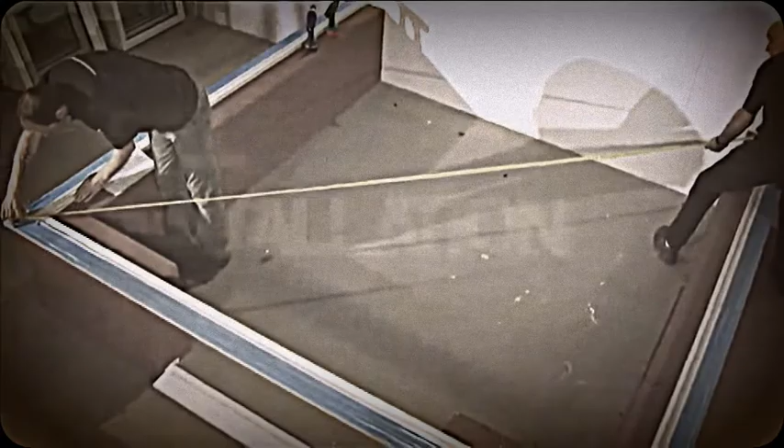Sill connectors. Join the sill sections with the appropriate sill connectors and assure that these are silicone sealed on all contact areas. Fit the sill's connectors to the sill using the screws provided. Measure the gap left for the doors and cut the sill to size with a saw so that it overhangs the brickwork for the door by 2 mm on each side. A separate length of 150 mm sill is supplied to fit between the dwarf walls.

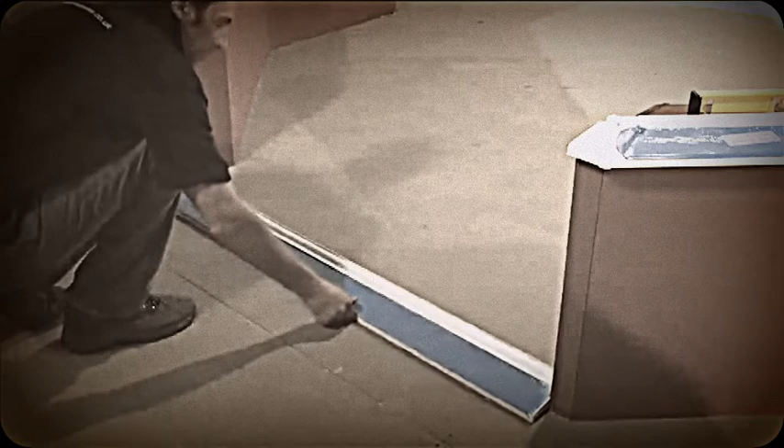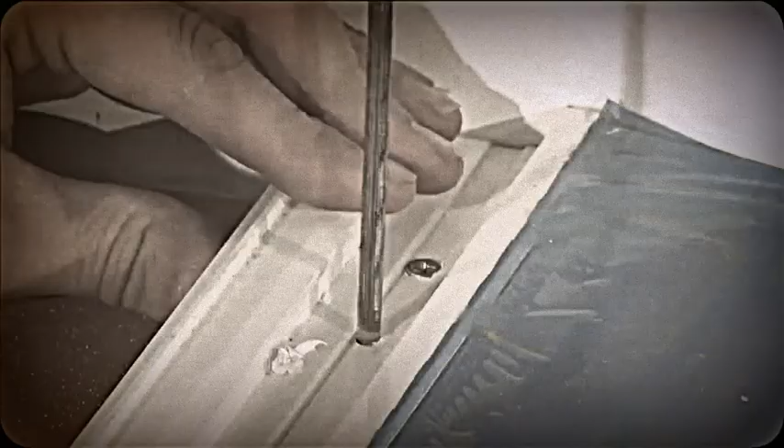Fixing sill. See your installation guide to view the key measurement checks. Once you're happy that this is accurate, drill through the sill and into the base to a depth of at least 100 mm. Permanently fix through the sill using the fixing bolts. These should be positioned 100 mm from each end of the sill and equally spaced.

Fitting first windows. Note, the wall connector supplied might be different to the one showing. Please refer to your installation guide.

Fitting panels. Locate the wall plate and connectors and mark out the position of the relevant fixing bolts. The first and last 60 mm fixing bolt should be positioned 50 mm from the top and bottom faces of the wall connector, with the rest being spaced equally between. A total of 3 fixing bolts are used per wall connector on a dwarf wall model and 5 per connector on a full height model.

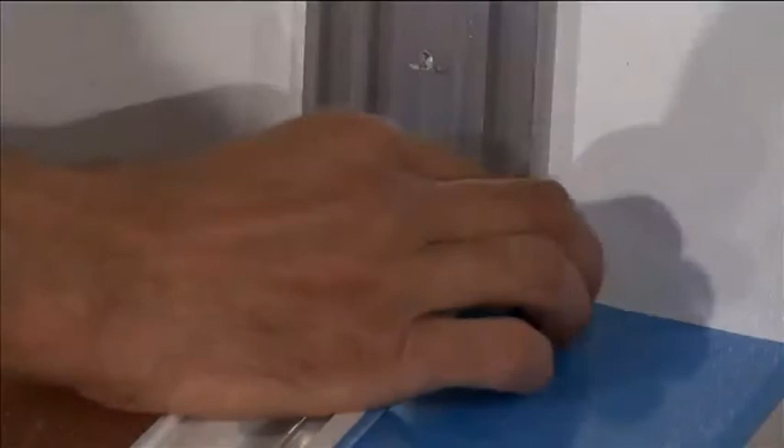If any of the positions marked for the 60 mm fixing bolts land on mortar joints, adjust the position accordingly so that they locate over solid brick. Position the wall connector so that the internal edge is in line with the margin on the wall drawn earlier. It is important to ensure that the connector is at an angle of 90 degrees to the base. Use timber packing if required.

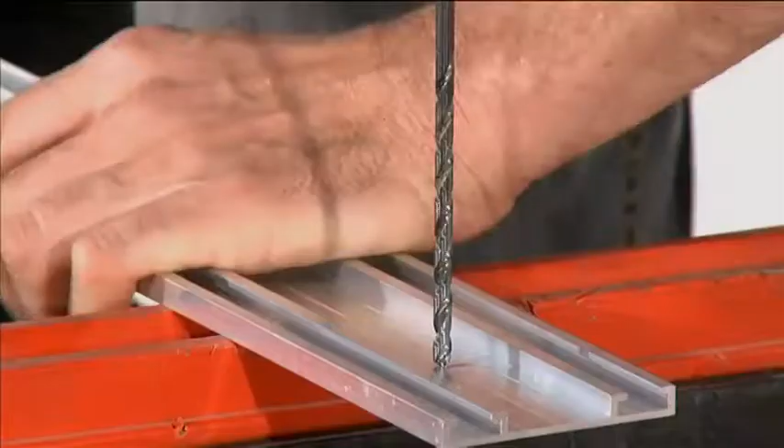Pre-drill the holes with an 8 mm drill. While holding the connector in position and ensuring that it rests onto the sill, pre-drill through the connector and into the brick using an 8 mm masonry drill. You're now ready to fix the connector with fixing bolts. Repeat this on the opposite side of the conservatory.

Some fixings shown in this DVD are for studio build only. Please refer to your installation guide for the correct fixings required.

Fitting first panels. Select the panel to fit against the property wall. Ensure that the drainage slots in every panel are located at the bottom of the panel and facing the outside of the conservatory. You'll notice that each panel corner has the inner legs on the panel detail notched away.

It's essential that this detail is present to ensure that all 18 mm inline couplings can slide into position. 2 sill support blocks should also be attached to each panel. If they're not, please refer to your instruction manual.

Position the window close to the wall connector. The legs of the sill support blocks should line up with the channel of the sill. Push or tap the window firmly downwards to clip into place. The base of the window should sit firmly down onto the sill. Check your installation guide for an alternative method.

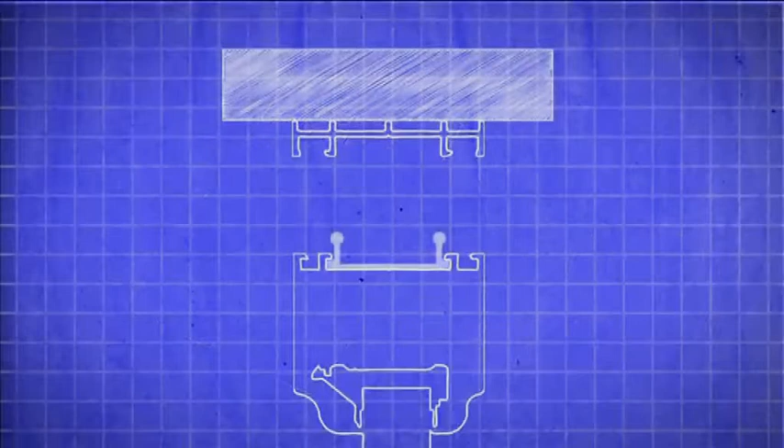Select the A129 wall plate adapter and 2 A128 wall plate connectors. Slide the adapter and connector downwards so it's held by the window's inner legs until it rests onto the sill. Slide the window and connectors along the sill to engage the legs of the connectors with the legs of the wall plate.

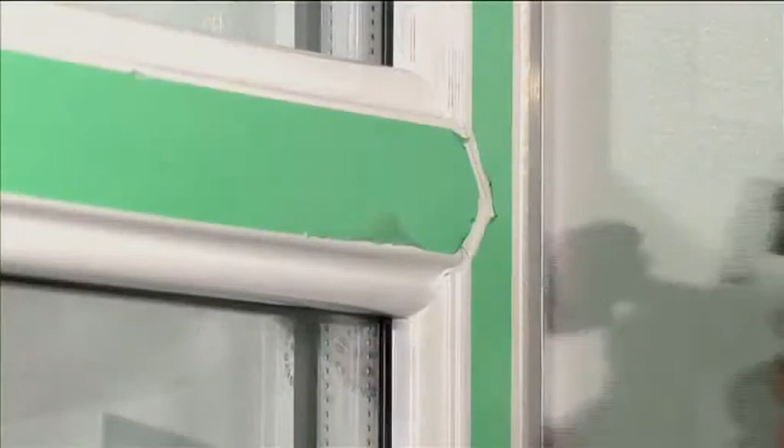Quarter-turn buttons should now be positioned between the panel and the wall connector, around 50 mm from the top and bottom. Using a 6 mm Allen key, rotate the quarter-turn button 90 degrees clockwise to lock it into position. 6 quarter-turn buttons are attached to each face on dwarf wall models, 8 for full height models.

Silicone should be applied to the sill where the two-part connector has made contact. Repeat for the opposite window.

Fitting windows in a straight run. Fitting intermediate panels.

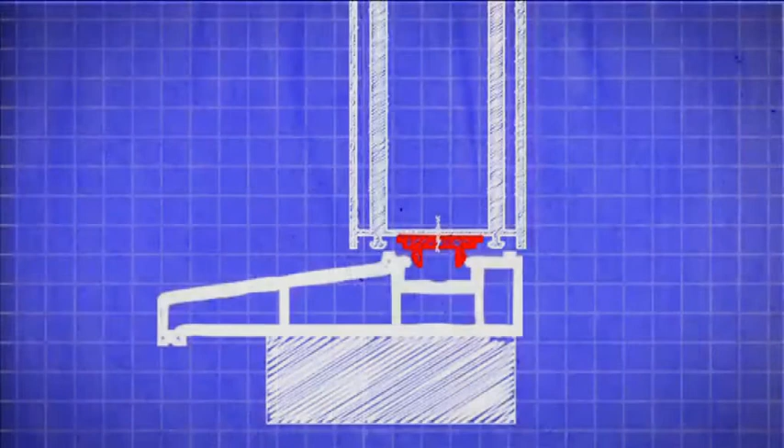Select the second panel and again remember to ensure the drainage slots are located at the bottom of the panel and facing the front. Fit the panel in the same way as you did the first and bring it into position around 18 mm away from the last panel to be installed. An 18 mm inline coupling should then be slid downward and through the gap between the two panels until it...

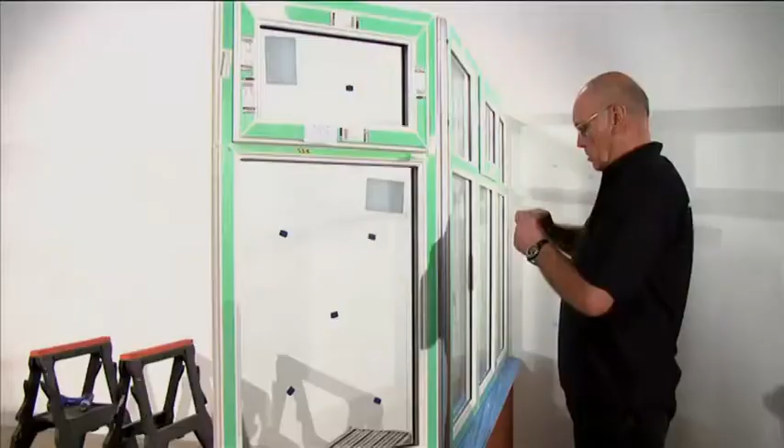Rests on the sill. Use the quarter-turn buttons to secure the panels in place. A quick check of the distance between the two panels should show a distance of 18 mm. The same process is applied to the installation of all other panels and 18 mm inline couplings.

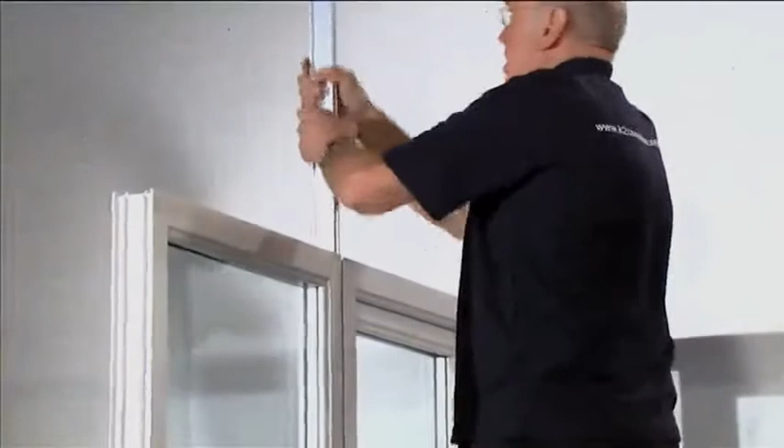Adjustable connectors: after every third 18 mm inline coupler along a run of connected panels, an adjustable inline coupling is required. These allow for adjustment to ensure that the panels will finish in the correct position when connecting to a corner post or a wall connector. For further detailed instructions on the adjustable inline couplings, please refer to the installation guide.

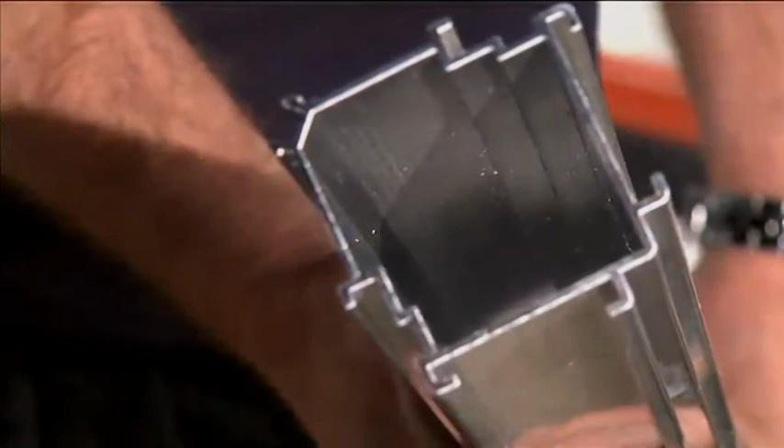90-degree post: the 90-degree corner post is slid from above between the two adjacent panels with the angled section positioned towards the outer corner of the sill, ensuring the leg detail on the aluminium interlocks with the detail on the panels. Check the installation guide for correct positioning for internal or external corners.

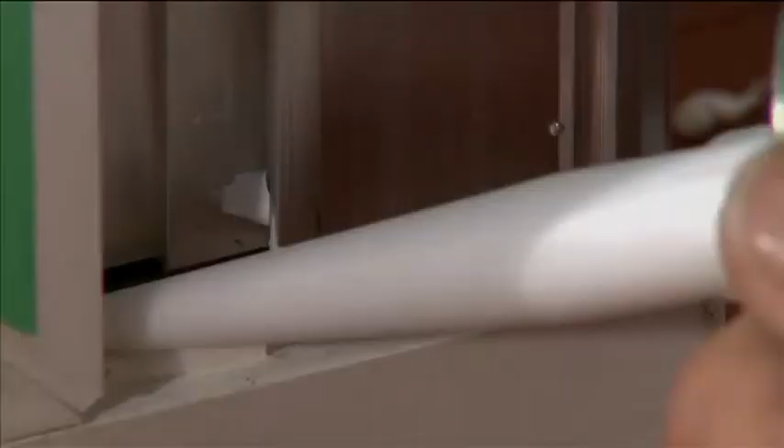Quarter-turn buttons are positioned in the gap between the panels and the 90-degree corner post. Run a bead of silicone around the base of the corner post.

We recommend at this point that you recheck the internal dimensions, width and projection, and check the measurements across the internal corners, which should be the same.

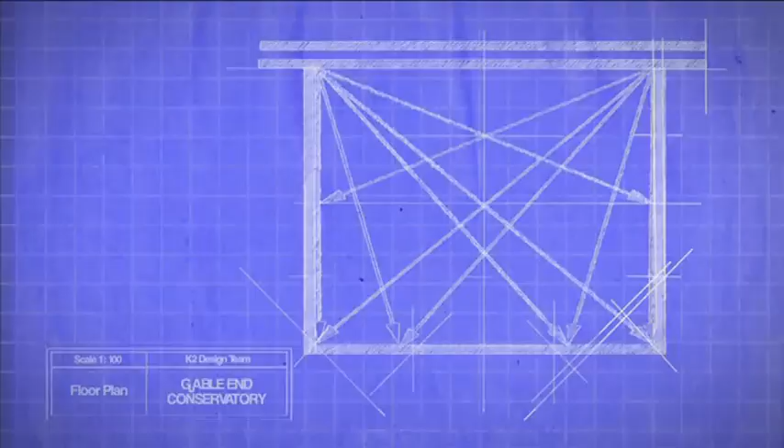Silicone seal the gaps between the front of the eaves beam external trim, P6024, and the front of the windows to create a watertight seal.

Position the eaves beam centrally on top of the windows. The inside face of the overhang will sit against the front face of the panels, and the end of the eaves beam will be flush with the outer face of the side panels.

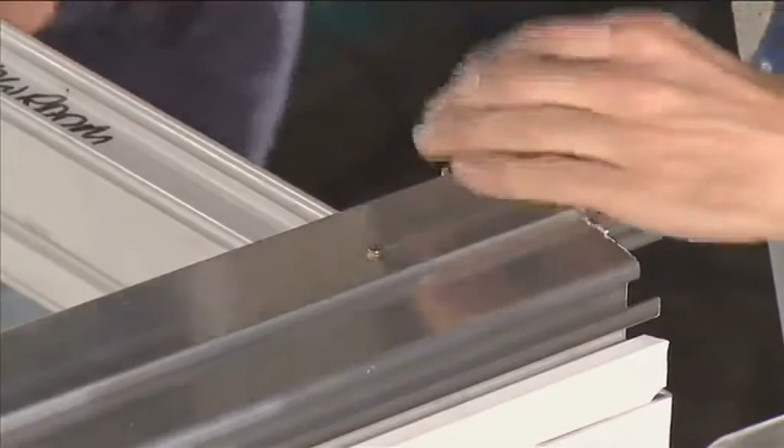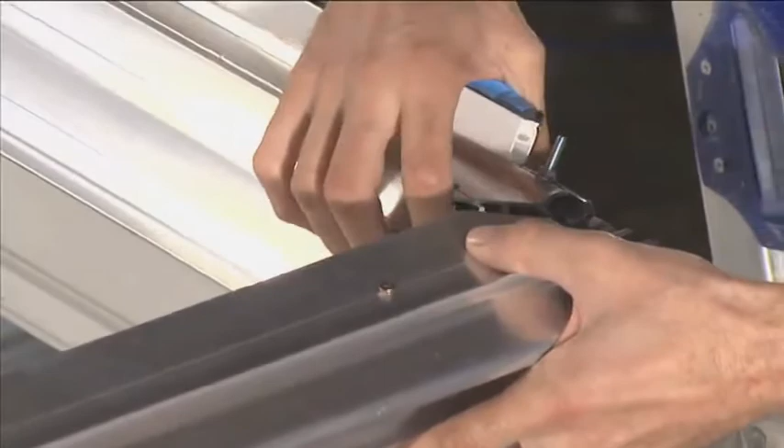The eaves beam pieces will also require joining at the corners. They're joined by using two eaves beam joiners which slot together and slide into the channels on the inside of the eaves beam. Apply a bead of silicone to the cut faces of the eaves beam prior to joining. Fix the eaves beam joiners into position with the 38 mm silver screws through the pre-drilled holes.

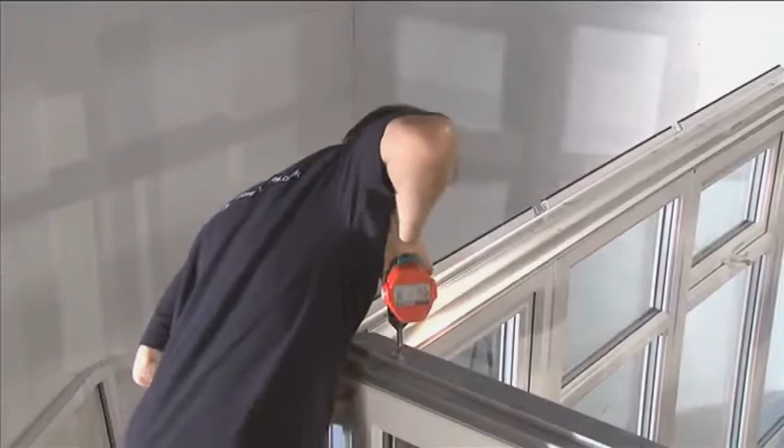Once assembled on top of the panels, drill through the eaves beam only using a long-reach 5 mm drill 100 mm from the edge of each window. The first holes from the end of the eaves beam should be at 100 mm to ensure it's fastened into the window. Power drive the fixing screws through the holes in the eaves beam and into the head of the window.

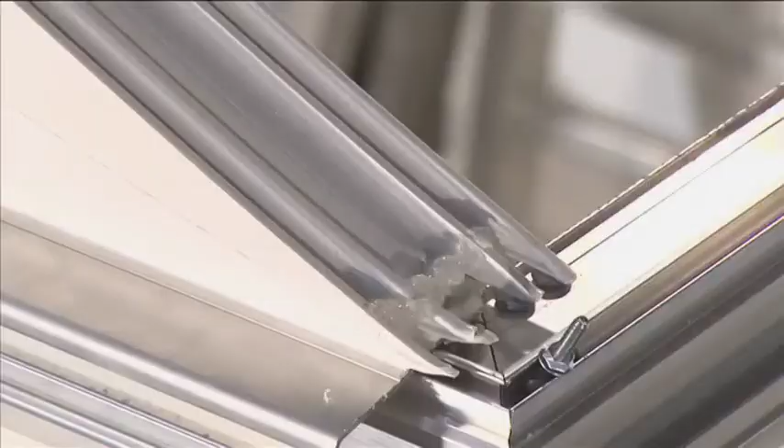Gable frame: apply a bead of silicone along the gable frame adapter. If the gable frame is already glazed, remove beads and glass from the gable frame, taking note of where each bead and glass unit goes. Place the gable frame onto the gable frame adapter, ensuring the external face of the gable frame is in line with the V-groove on the gable adapter.

Pre-drill through the gable frame and into the eaves beam. Using silicone to seal the holes, secure onto the eaves beam using the 4.8 by 60 mm screws at 450 mm intervals.

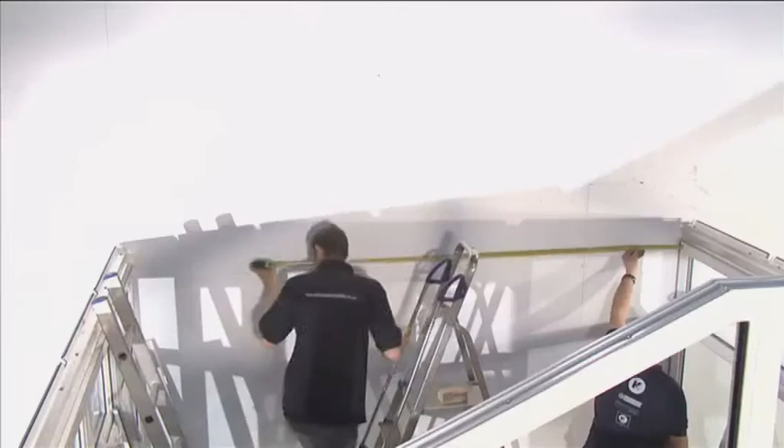Ridge installation: mark the host wall with the dimension from the top of the windows to the internal ridge. Fix a wood block at least 50 mm deep to the host wall, with the top face set at the internal ridge height. It will support the ridge assembly whilst you erect the rest of the roof. Do not remove it until the roof is assembled.

Lift the ridge assembly and rest the rear face on top of the wooden block, and the front face into the recess at the top of the gable frames so that they are in line.

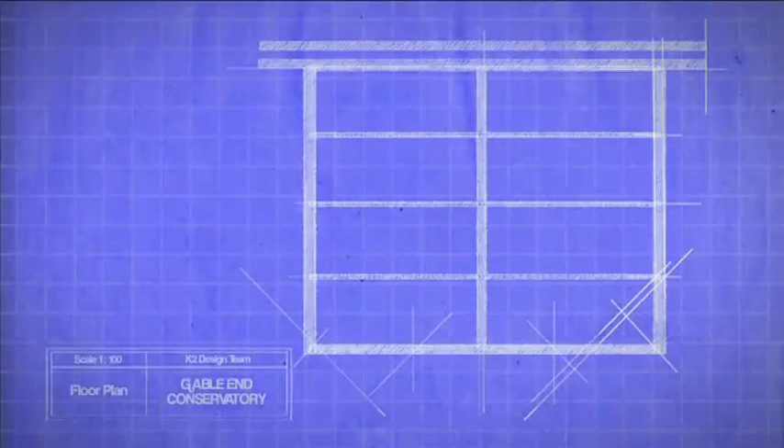To identify the glazing bar positions for your conservatory, refer to your diagram. The glazing bars can then be counted anti-clockwise around the layout. Run a bead of silicone along the top faces of the gable frame.

Start the ridge assembly by attaching the starter bars over the single bolt retainers in the eaves beam. Drill through the starter bars into the top of the gable frame and secure.

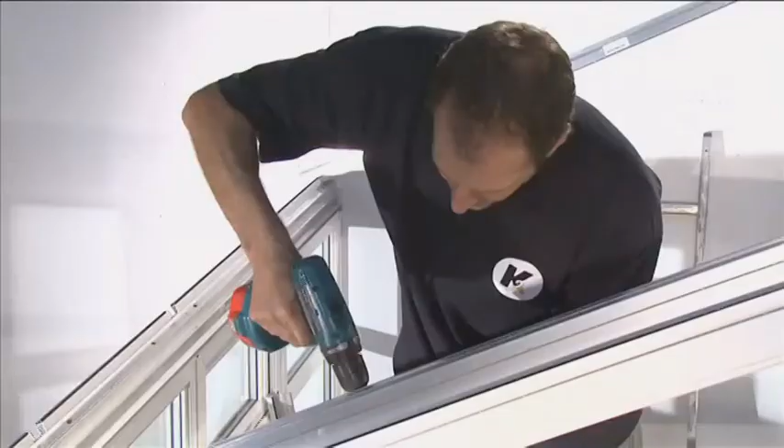Main spars installation: the main spars are the bars that attach to the ridge. When starting to fit the bars, work anti-clockwise.

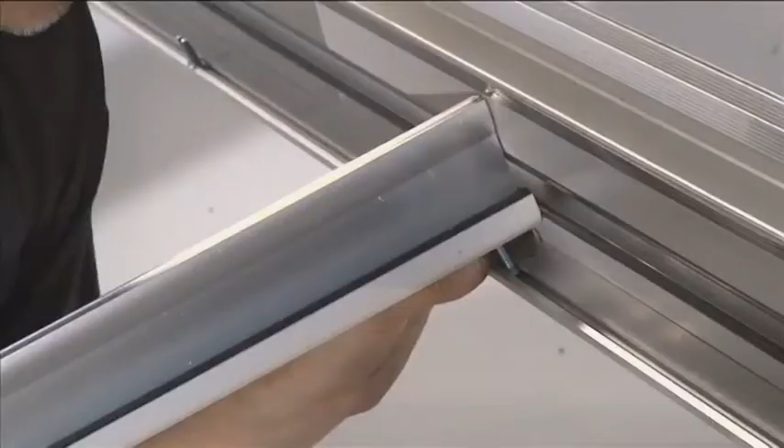Remove the protective film from the spar undercladding, slot the spar holes over the M5 by 25 mm bolts in the double retainers located in the ridge. Do the same for the holes at the bottom of the spar, which connects to the M5 by 25 mm bolts in the double retainers located in the eaves beam.

Loosely thread on the M5 locking nuts. Repeat for all bars that connect to the same side of the ridge. Check spar position before tightening the M5 locking nuts.

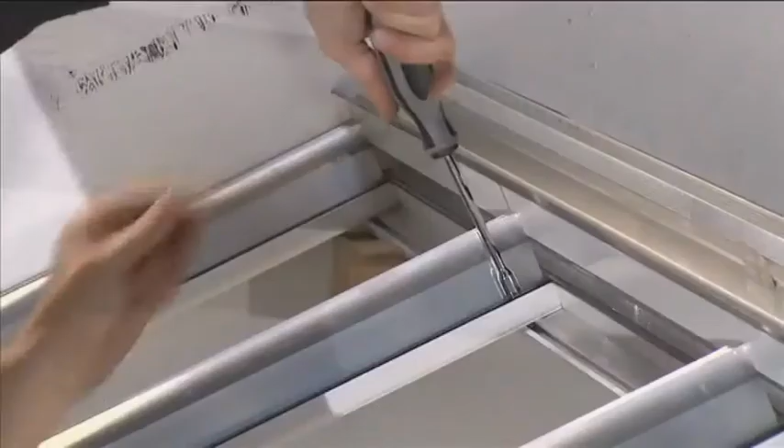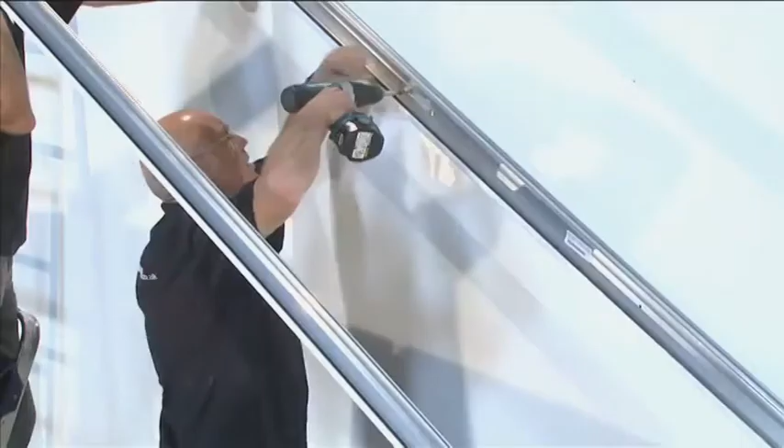See your roof plan. If all checks have been performed, it's now possible to permanently fix the wall bar to the host wall. Drill and fix the wall bars using fixings positioned 150 mm from each end and no more than 600 mm apart, avoiding mortar beds.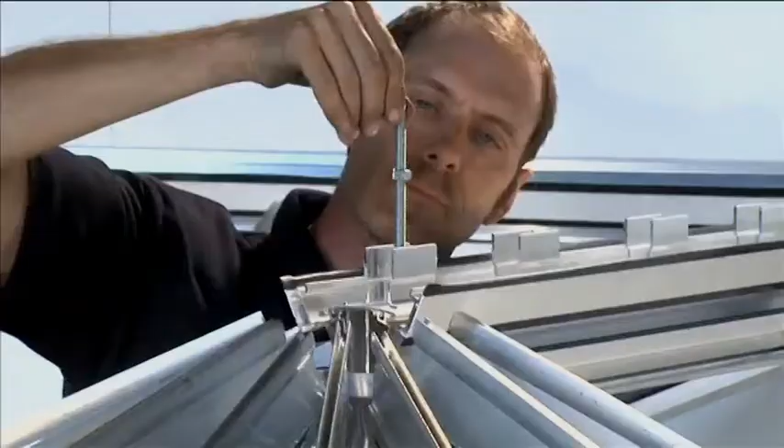First, screw an M10 fixing nut onto the threaded bar. Insert the threaded bar through the pre-drilled hole in the ridge centre. At this stage, it's a good time to fit the ridge undercladding with the tie bar rod fitted in place. Thread the vertical tie bar conduit over the threaded bar and insert into the hole in the internal ridge cover.

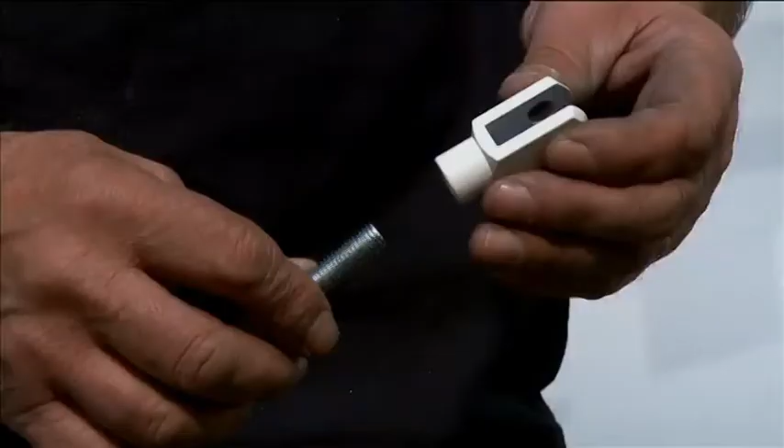As the lug is already attached to the glazing bar, screw the horizontal threaded tie bar rod into the clevis. Once the rod has been attached, the clevis can be fixed to the lug with the M10 nut and bolt. Attach both tie bar rods on the left and right sides of the conservatory in this way.

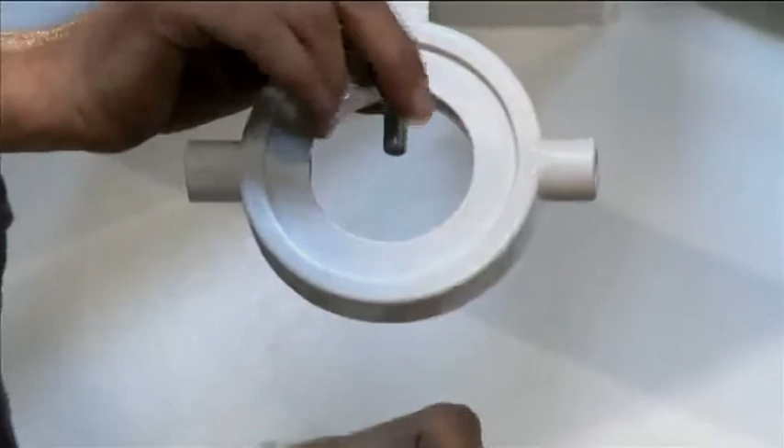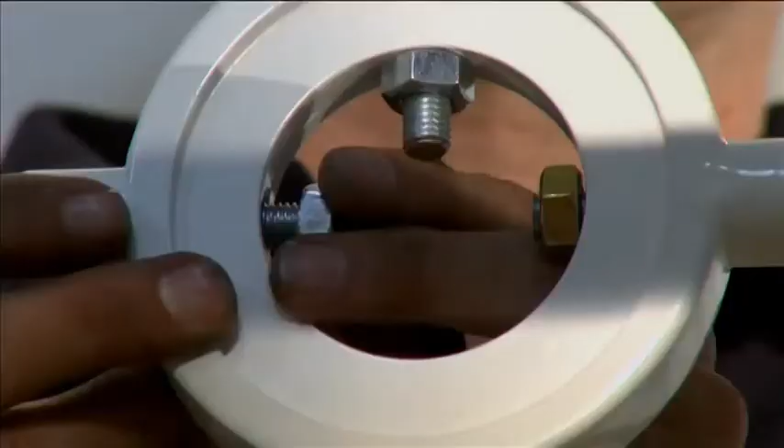With the vertical tie bar rod and the two horizontal tie bar rods in place, raise them all together towards the centre and thread the ends of the tie bar rods through the holes in the three-way tie bar centre boss. Check the horizontal tie bar rods for level before tightening the M10 tie bar centre boss locking nuts fully.

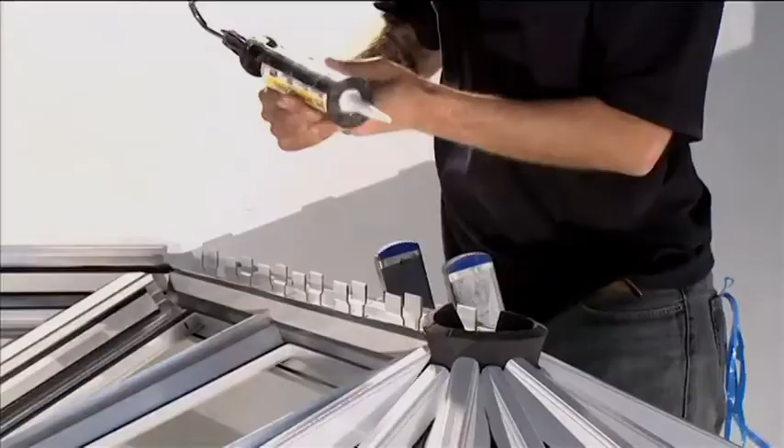Ridge capping. Fold the universal foam bung into a semicircle, ensuring the ends are tucked towards the centre. Place into the void on the boss end so that the outer face rests against the end of the glazing bars. Using the silicone provided, run a continuous bead around the joint between the foam bung and the glazing bar top caps.

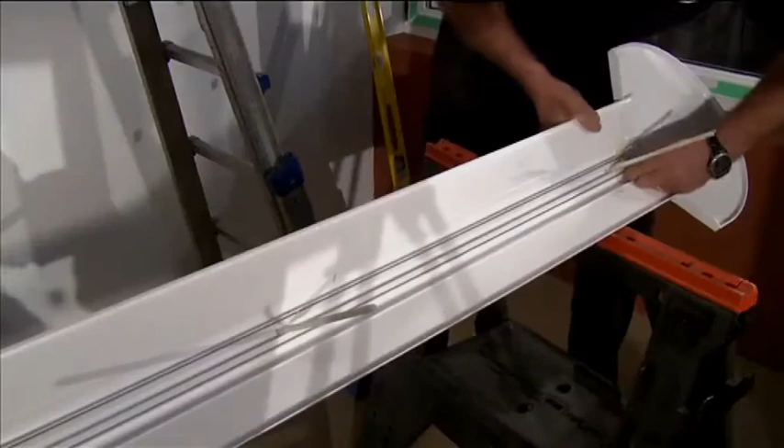Fitting the ridge cover. When fitting the ridge cover, first slot the holding down bolts into the groove on the underneath of the external ridge capping. Then attach the boss end foam trim around the perimeter of the underside of the boss end cover. Remove the adhesive tape and press firmly onto the underside of the capping.

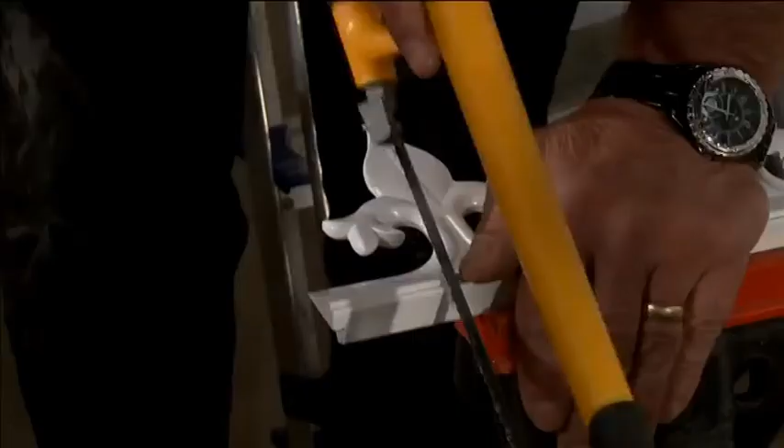Slide the finial fully onto the ridge capping as far as it'll go. Slide the pieces of cresting into the open-ended channel of the external ridge cover. The last piece of cresting may have to be trimmed. See your installation guide for instructions.

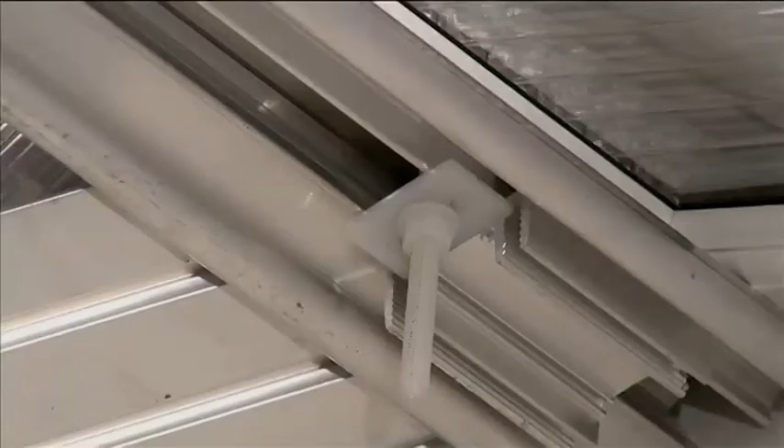Lift the ridge capping assembly onto the top of the ridge assembly and push down so that it locates on the prongs of the ridge centre. Slide the rectangular washer up the holding down bolts until it touches the ridge wings and finger tighten the nylon nut onto the holding down bolts to make the external ridge capping secure.

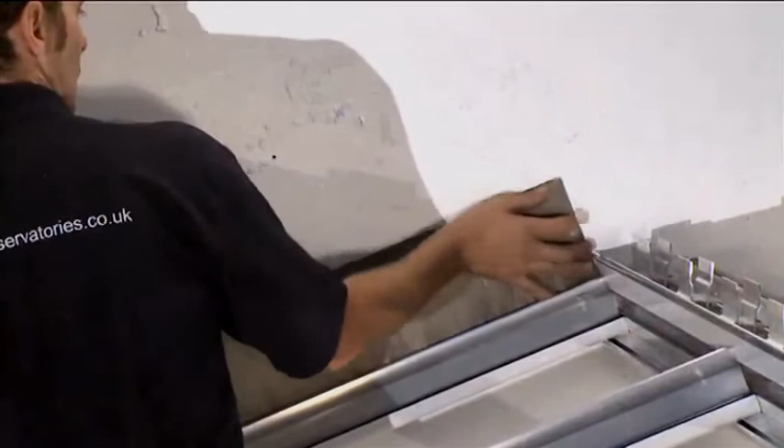Primary seal to host wall. Self-adhesive flashing tape is included in your conservatory kit. This product is suitable for use where the host wall is flat and even, for example face brickwork. The tape is provided as a means of temporarily sealing the conservatory from water ingress.

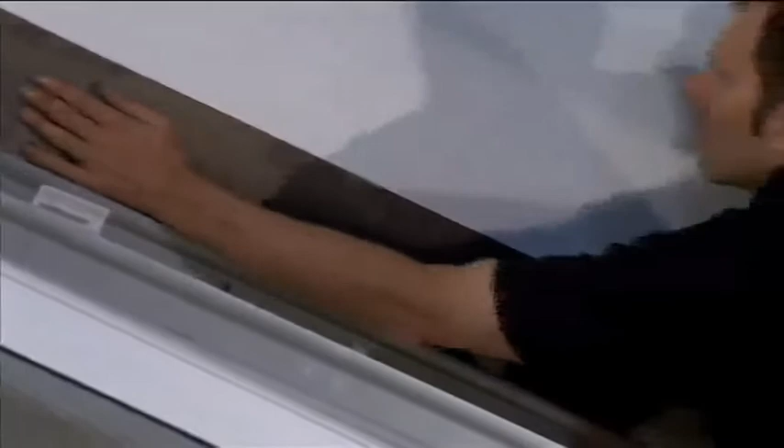Although the flashing tape, if applied in accordance with the manufacturer's instructions, can function for many years, it's not a long-term substitute for traditional lead flashing. We would recommend that you employ an experienced builder to carry out lead flashing works during the construction of your conservatory, or at some time in the near future.

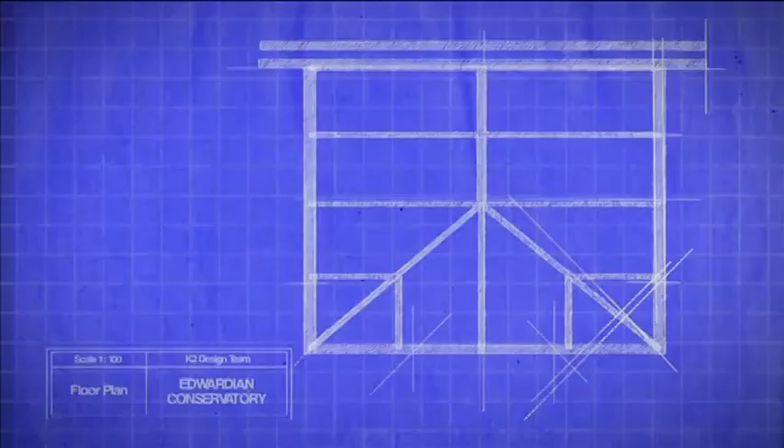Roof glazing installation. If your glazing material is polycarbonate, it's important to note that the surface which is protected by the printed polythene film is the surface that is on the outside of the conservatory. Each roof glazing sheet is labelled with the corresponding number on your roof plan.

Please note that if your conservatory roof has glass roof glazing sheets, some may require jointing with muntin bars. See the muntin bars section for instructions on how to install, as well as the back of the installation guide.

When fitting the ridge cover, first slot the holding down bolts into the groove on the underneath of the external ridge capping. Prior to the installation of the finial, it may be required to trim the underside to fit. Slide the finial fully onto the ridge capping, leaving space for the ridge end cap to be attached.

Slide the pieces of cresting onto the external ridge cover through the moulded grooves from the opposite end of the external ridge cover. The last piece of cresting may have to be trimmed. See your installation guide for instructions. Run a bead of silicone around the contact faces of the flashing trim and attach to the ridge assembly.

Lift the ridge capping assembly onto the top of the ridge assembly and push down so that it locates on the prongs of the ridge centre. Slide the rectangular washer up the holding down bolts until it touches the ridge wings and finger tighten the holding down bolts to make the external ridge capping secure.

Primary seal to host wall: self-adhesive flashing tape is included in your conservatory kit. This product is suitable for use where the host wall is flat and even, for example face brickwork. The tape is provided as a means of temporarily sealing the conservatory from water ingress.

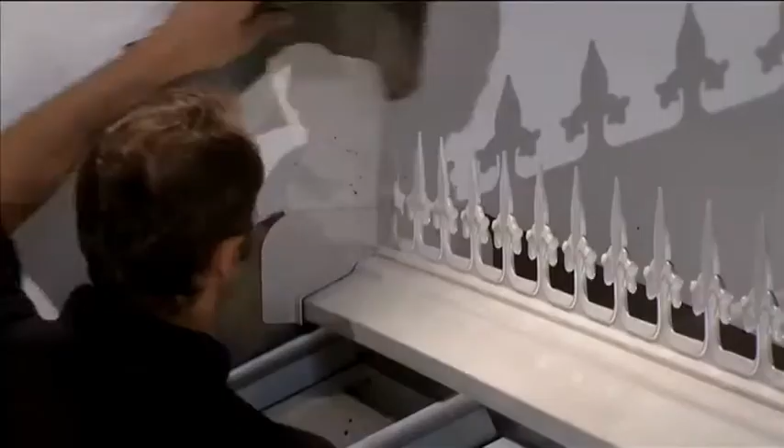Although the flashing tape, if applied in accordance with the manufacturer's instructions, can function for many years, it's not a long-term substitute for traditional lead flashing. We would recommend that you employ an experienced builder to carry out lead flashing works during the construction of your conservatory or at some time in the near future.

Roof glazing installation. If your glazing material is polycarbonate, it's important to note that the surface protected by the printed polythene film is the surface that is on the outside of the conservatory. Each roof glazing sheet is labelled with the corresponding number on your roof plan.

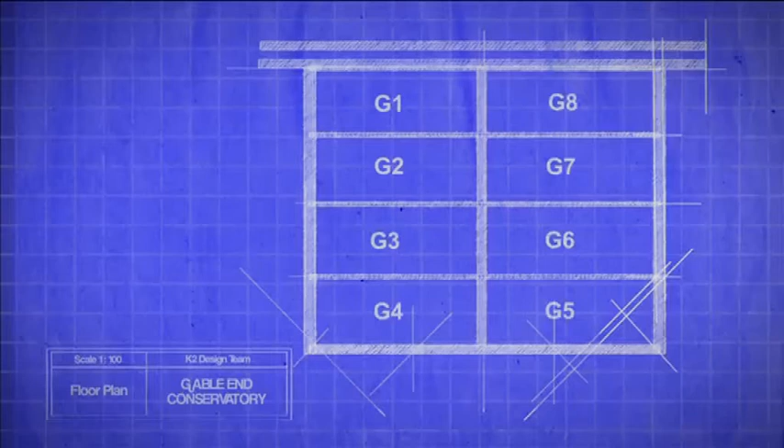Please note that if your conservatory roof has glass roof glazing sheets, some may require jointing with muntin bars. See the muntin bars section for instructions on how to install, as well as the back of the installation guide.

Although the glazing end trims may already be fitted on the polycarbonate glazing sheets, they will have to be removed to allow the application of a bead of silicone along the top face of the breather tape, where it will come into contact with the glazing end trim. Reattach the end trim once application is complete.

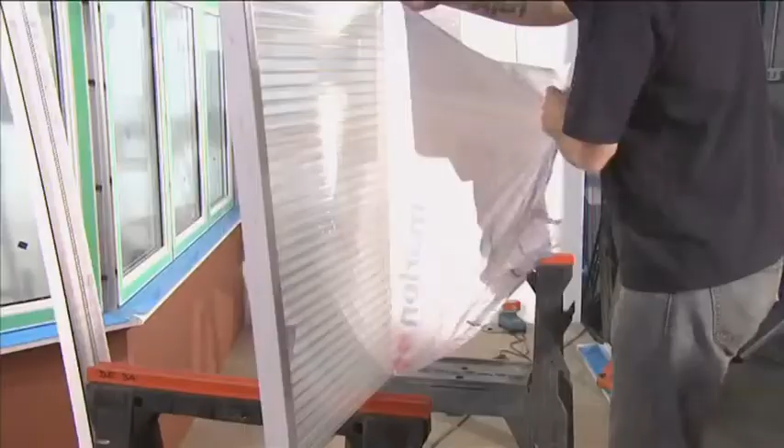Select the first roof glazing sheet and remove its protective outer film. It is recommended that only a 100 mm perimeter of the inner protective film is removed at this stage of conservatory installation, as this will help protect the roof glazing sheet from any unnecessary damage. The inner protective film can be completely removed once all plasterwork is complete.

Start with the roof glazing sheets against the wall and to the left, with the face that had the printed film facing outwards. This first sheet will be labelled as G1.

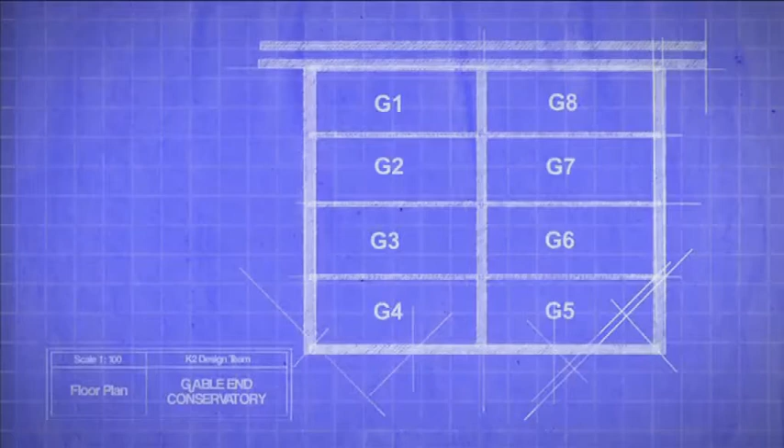Prior to fitting the roof glazing sheets, it's recommended to peel back around 50 mm to 100 mm of the glazing tape protective film. This enables adjustments to be made to the position of the roof glazing sheets without permanently sticking the entire roof glazing sheet to the eaves beam closure.

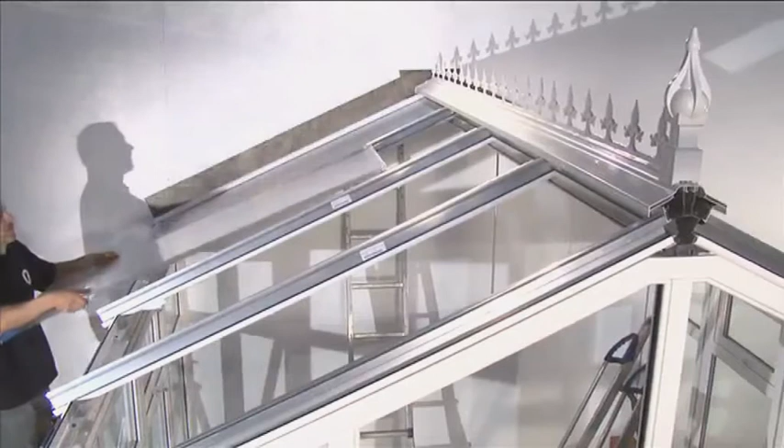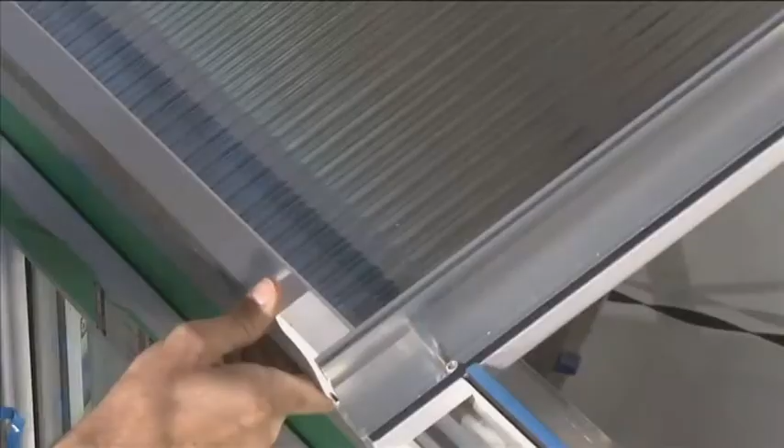Push the roof glazing sheet up into the universal ridge wings, then slowly allow it to slide back down away from the ridge until it rests flush with the bottom of the transom glazing bars. Allow the roof glazing sheet to gently rest onto the eaves beam closure.

Once 2 adjacent glazing sheets are installed, fit the glazing bar top cap. They will permanently keep the roof glazing sheets in place and create a watertight seal.

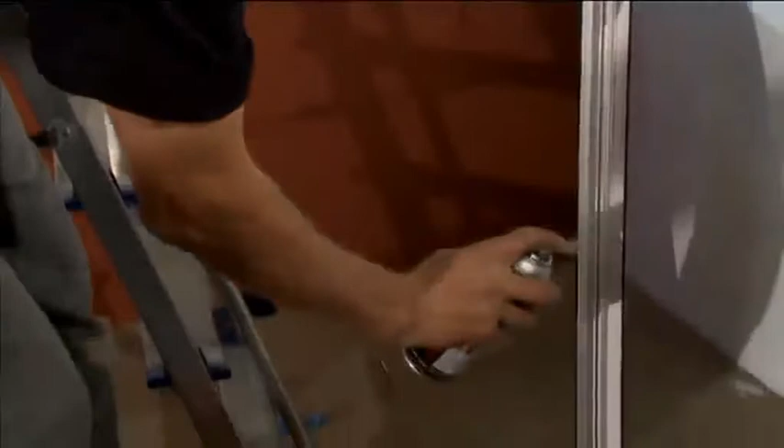Fitting glazing bar caps. Select the appropriate glazing bar top cap by matching its number with the corresponding glazing bar number. Prior to installing the glazing bar top caps, the top cap rubber gasket must be lubricated with a solution of mild soapy water or a silicone spray. This will allow the top cap to spread more easily during installation.

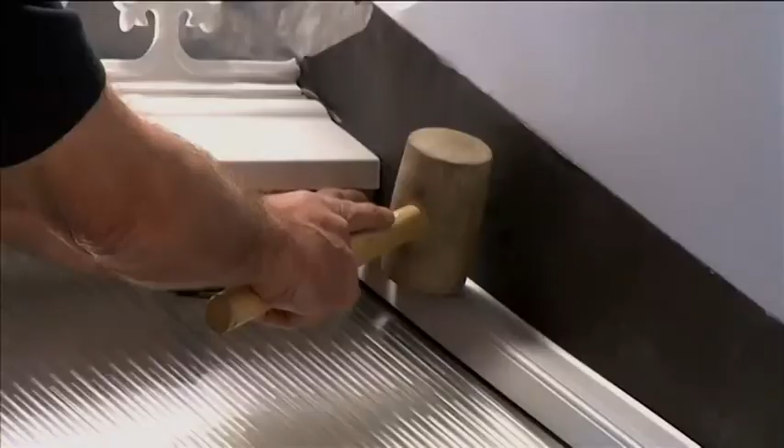Use a glazing mallet or similar plastic surfaced mallet to knock on the glazing bar top caps, starting at the top and working down the glazing bar towards the eaves beam. When the glazing bar top cap is attached, ensure that the bottom face of the top cap is aligned with the bottom face of the glazing bar. Remove the protective film from the glazing bar top cap.

Now fit the remainder of the roof glazing sheets and glazing bar caps in the same way as previously described. Fitting glazing bar end cap.

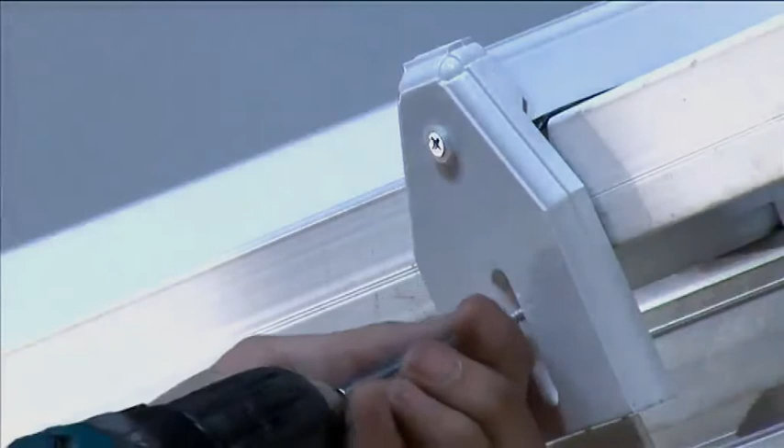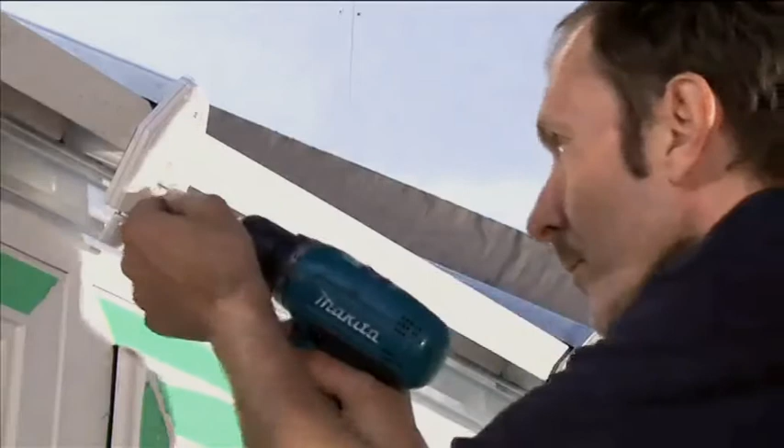When the glazing bar top caps are attached, you need to close the end of the glazing bar with the glazing bar end cap. The glazing bar end cap is attached to the glazing bar by 2 3.9 by 19 mm yellow screws. Sit the lip of the end cap over the top cap and locate the top screw through one of the plastic washers supplied and into the port in the glazing bar. Use the hole in the end cap that aligns with the bottom screw port to locate the second screw. Ensure that the screw cover caps supplied are used to hide the screws once in position.

Guttering installation. The gutter support bracket should be positioned 150mm from each corner and the remainder equally spaced. To fit the brackets, place the top of the bracket into the groove on the eaves beam, then pull the bracket downwards until it locks into place.

Hang the back edge of the gutter onto the bracket and rotate up the back of the bracket as shown. Fit only to the first click. Don't push all the way up.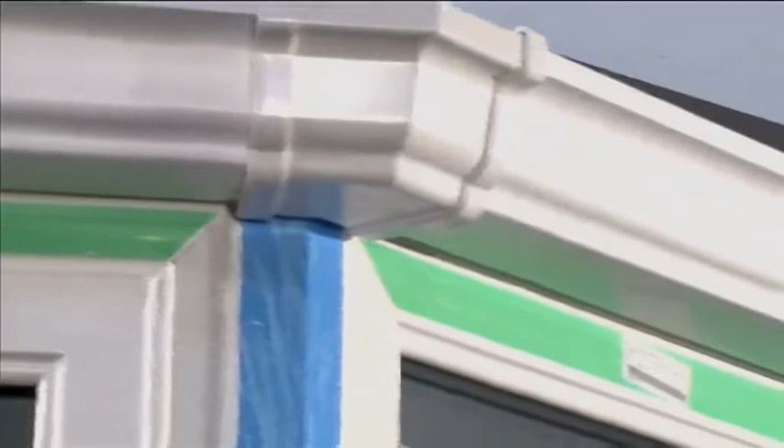Where there are stop ends or outlets on the gutter, you'll need gutter joint clips to fix these in place. Position the gutter joint clips over the gutter. Slide up the back of the gutter until the hooks engage over the gutter, then pull up the front of the joints and clip over the gutter. Once the clips are in place, you can push the gutter up into its final position.

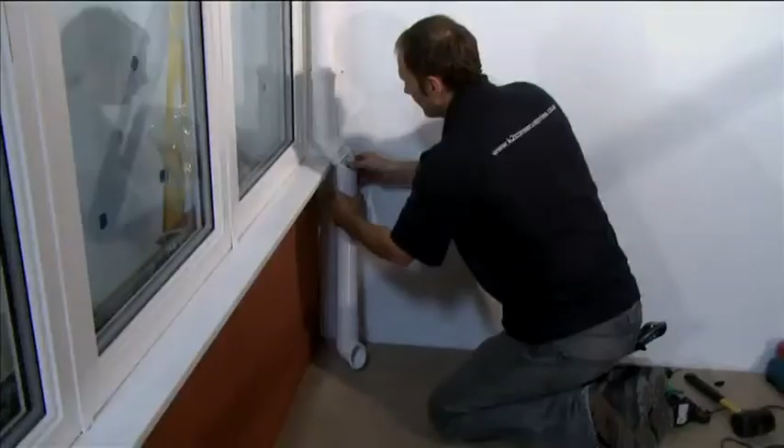With the gutter and clips in place, you can now fit the downpipes and brackets. You'll need to cut the round downpipe into two lengths and join them together using the downpipe bends, to allow the round downpipe to sweep over the sill and down the dwarf wall to the ground. The cut in the round downpipe produces two lengths that suit the height of the window frames and the dwarf wall. Push fit the downpipe onto the spigot of the stop end outlet.

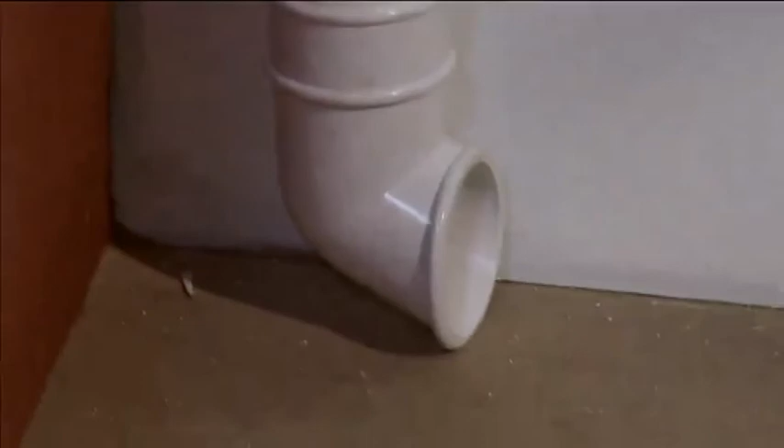Connect the downpipe shoe to the base of the downpipe. Fix the downpipe in position using the downpipe retention clips. They can be clipped over the downpipe and fixed into position with the screws provided. Note, to ensure adequate drainage, it is important that all round downpipes supplied are fitted.

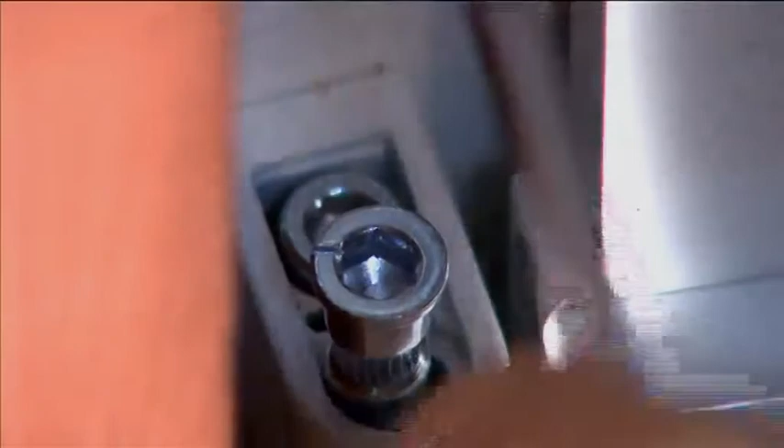To hang the door, lift and slide the door sash assembly to allow the sash hinge adjuster to slide between the outer frame hinge. Pass the hinge pins through both hinge parts. Ensure the slot mark in the hinge pin points away from the sash. You might need to tap each pin down using a mallet.

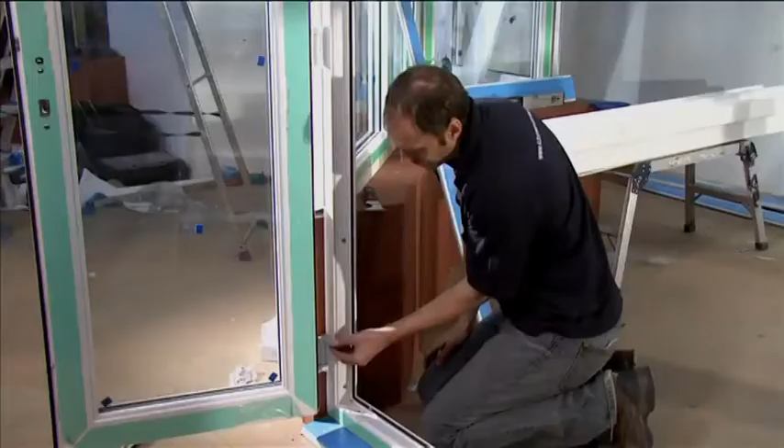Don't fit the outer hinge cover and sash hinge cover caps yet, as adjustments may be required later. At this point, you can tighten the grub screws. Fit the door handles and cylinder.

Vertical adjustment is achieved by inserting the Allen key into socket 1 and turning it clockwise to lift the door sash.

Horizontal, front to back adjustment can be achieved by inserting the Allen key into socket 2 and turning 90 degrees in either direction to adjust the compression of the door sash. Note that the pin grub screw needs to be removed to allow this adjustment.

Horizontal left to right adjustment can be achieved by inserting the Allen key into socket 3 and turning clockwise to move the sash inwards, or anti-clockwise to move the sash outwards. Fit the outer hinge cover once the adjustments have been made.

The shoot bolt keeps have an adjustable top plate. Loosen the locking screws on each plate prior to adjustments. On the slave door, adjust the top section so that this door is pulled into the frame tightly, ensuring that they're retightened afterwards. Adjust the master door keep as required to ensure that the door latching and locking operate smoothly.

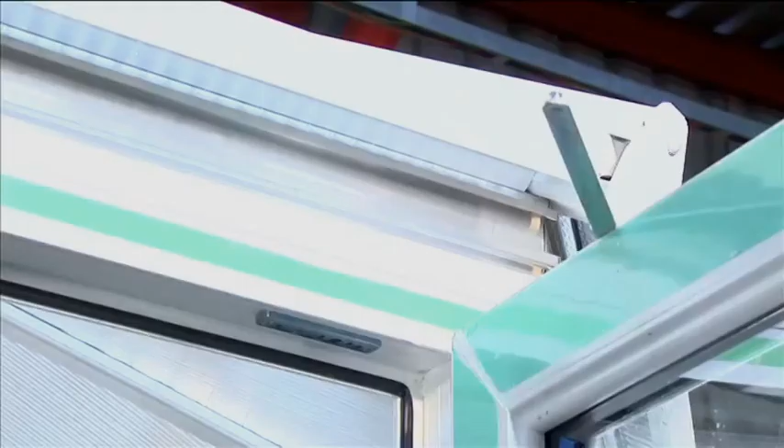When both door sashes are in place, you can connect the restrictor arm assemblies. Locate the button on the sliding arm into the receptor of the fixed restrictor assembly. Push upwards until the button snaps into place. Tighten the restrictor arm lock using the 2mm Allen key.

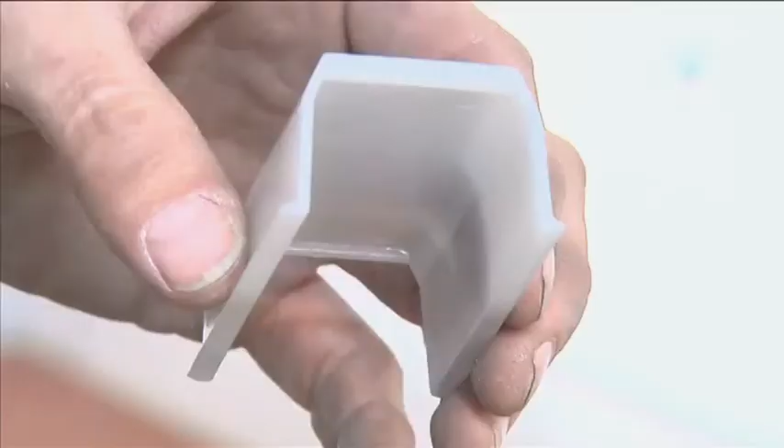Trims and finishing. Clip the 70mm cover packers into the eaves beam at regular intervals. Select the eaves beam internal cover and position into the barbs on the eaves beam and press into place. Select the eaves beam 90-degree joint cover and press into place into the corner gaps between the eaves beam cover.

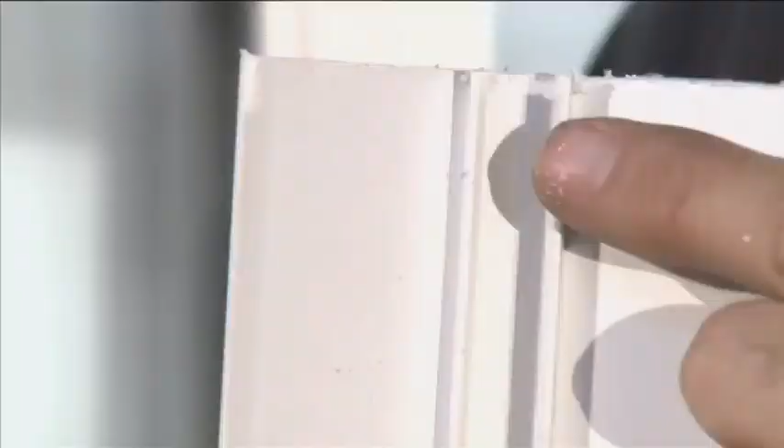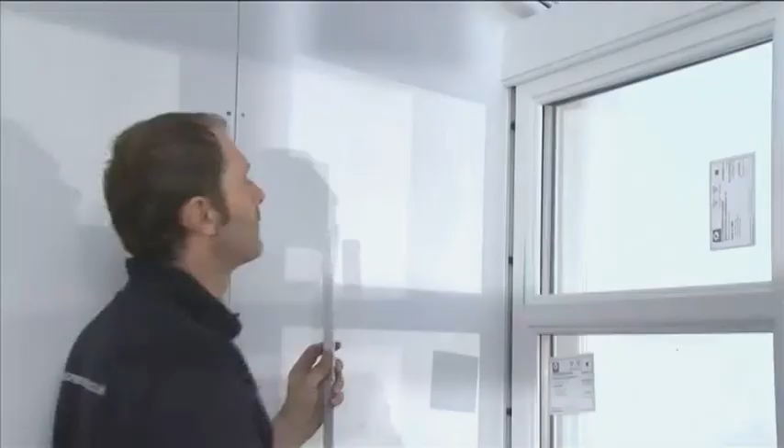Select the 90-degree corner post cover and push onto the leg of the post, and slide upwards until the front meets the eaves beam. Position an 18mm coupling cover over the barbs on the inside of the post and push to fit. The 18mm coupling covers will need trimming to fit underneath the external eaves beam trim and eaves beam cover. Select the 18mm coupling covers and position onto the recesses of the sides of each quarter-turn button.

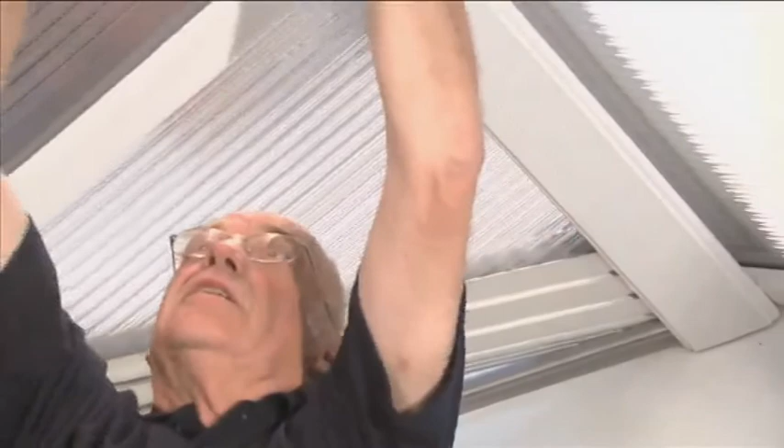On the 18mm inline couplings, push to fit. Repeat for each inline coupling and on the inside. Position the ridge internal cover beneath the serrated prongs of the aluminium ridge spacers. Push the internal ridge capping into position until it touches the bottom of the glazing bars on each side of the roof. Apply self-adhesive foam tape along the length of the bottom edge of the starter bars.

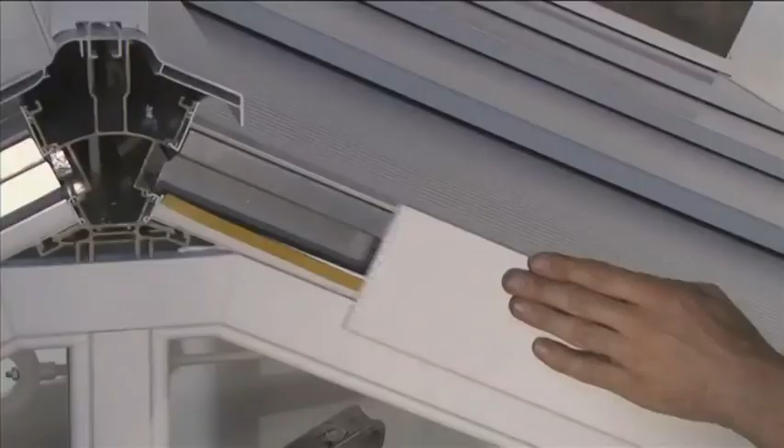Hook the fascia trim over the top edge of the starter bar top cap. Peel back the adhesive protective strip and stick the fascia trim to the starter bar. Apply a bead of silicone around the inside edge of the ridge cover cap and attach to the end of the ridge.

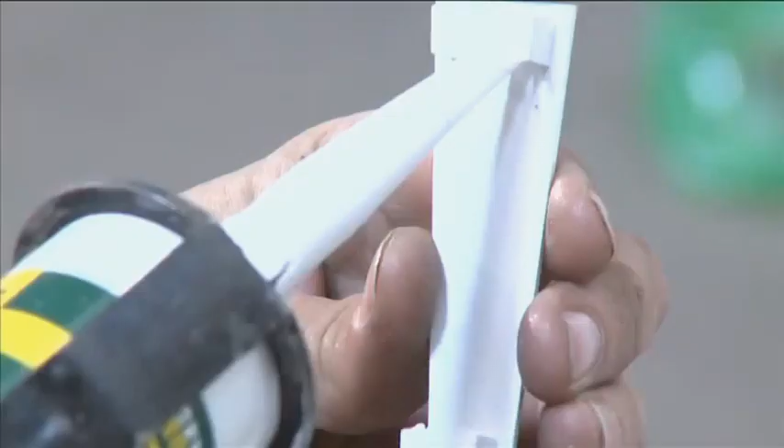Fit the handles to all opening sashes using the 5 by 20mm handle screws. Attach the sill end caps at the door using a bead of silicone. Silicone between the sill and dwarf wall. At this stage, reinstall the glass and glazing beads in the gable end.